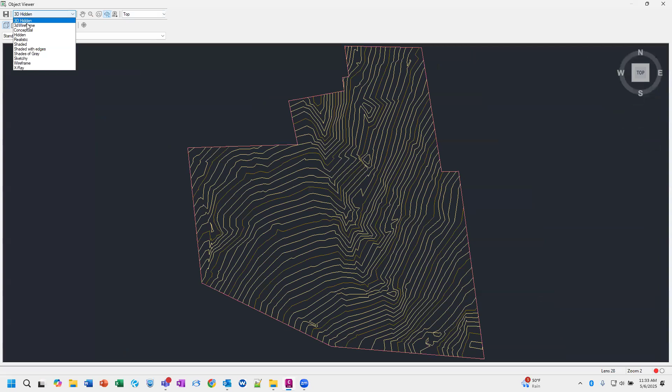This is old, this has been around forever. Let's see, I changed that to shades of gray. All right, and I can see this—but the problem is it locks up my drawing. I can't do anything in the drawing, it's frozen, and it's just here. This has been great, I use this all the time.

New in 2026 is this thing called the model viewer. Probably should get rid of Teams for the day, huh? I knew I would forget something. Oh wait, Tina. There we go, now I won't be bothered anymore by them. I'll get rid of Outlook as well.

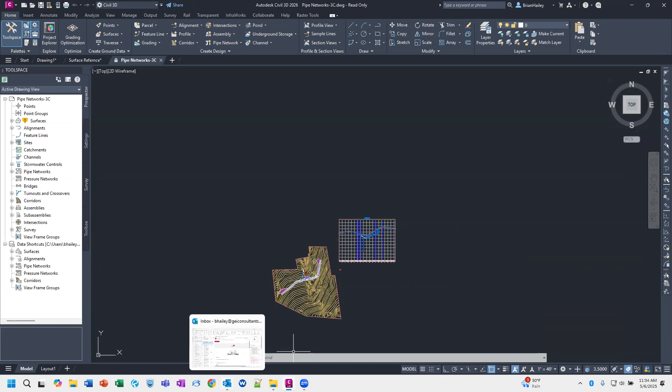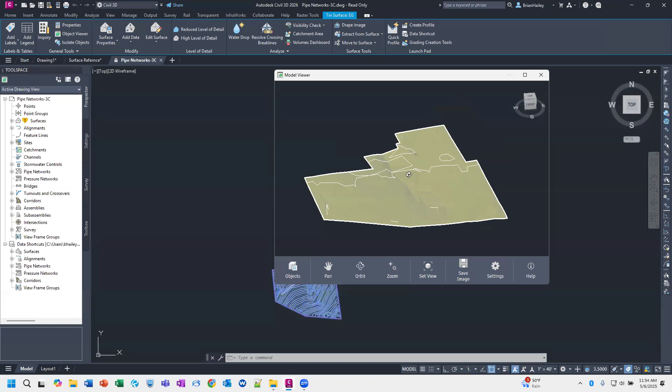Okay, so if you select an object, just like I did before, right click, you'll notice in the middle there's the option to add to model viewer. So this is the model viewer, and of course it comes up on my other monitor. It's very similar to object viewer—you can pan around, orbit, zoom in, zoom out. The nice thing about this is your drawing is still live, so you can continue to look around in your drawing.

You can pan around in model viewer, check out this thing over here. You can also add things to the model viewer—so I can grab my corridor, right click, and add to model viewer, and you'll see my corridor is now part of the model viewer. So you can have this off on your other monitor, so you can see what's going on in 3D and all that fun stuff.

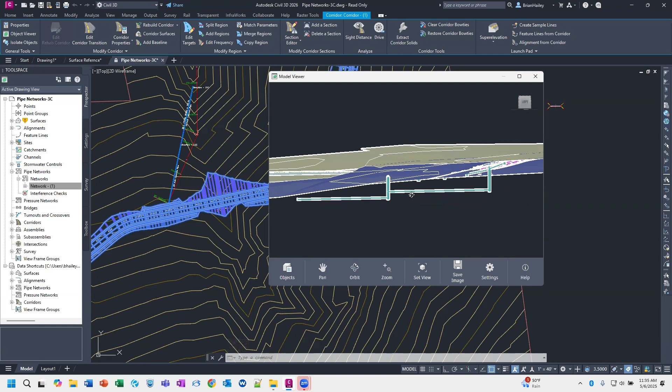You can also do this through the prospector. If I go to the prospector tab, pipe networks, right click on the pipe network, I can choose to add to model viewer. Now I have my pipes in the model viewer, and you can see down below my surface, there are the pipes. Pretty cool stuff here—knew your fourth monitor would come in handy, huh, Thomas? Yeah, I just have the three, so.

Now, another thing we can do with the model viewer is, if you notice, there's the option for objects. So if I click on objects, it opens up this little side panel. Let me make this a little bit bigger here. And I can change the display of things. So I'm no longer interested in the corridor.

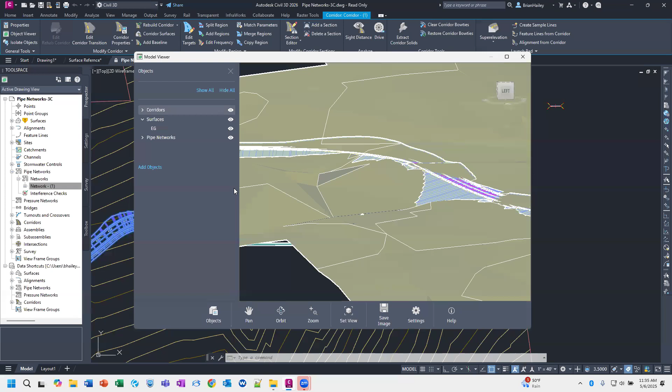I can just turn off the display of the corridor, and then I can turn it back on as well. Maybe I just want to see just the pipes. I can turn off all my surfaces, my corridors, and now I'm just looking at the pipes.

Now, one thing I would love to see, and I don't think this is an option, at least I haven't been able to find it, is I would love to be able to add a transparency to objects so I can see through them. Like right now, the surface is blocking my view of the pipes, so I actually have to come up underneath it to view the pipes.

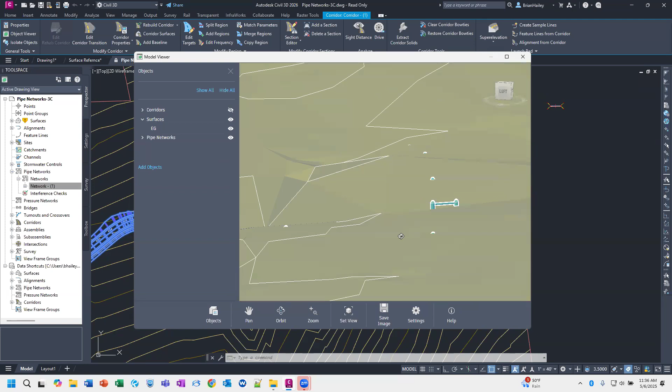What I would love is just the option to make this transparent. But if anybody knows if you can do that, please put it in the chat. I would love to be able to do that.

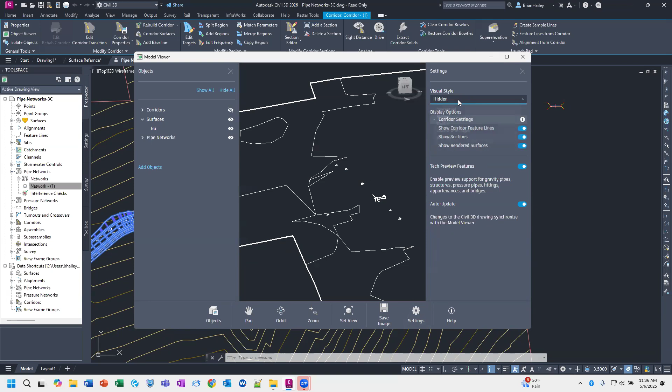All right. There are some settings. So if you come over here to your settings, you've got some corridor options. There's an auto update. You can change the visual style. So I can change it to like hidden, shaded, shaded with edges. Ooh. All right.

I'll probably just leave it set to conceptual. I'm surprised there's no shades of gray. That was always my favorite in the object viewer. But yeah. So that's the model viewer.

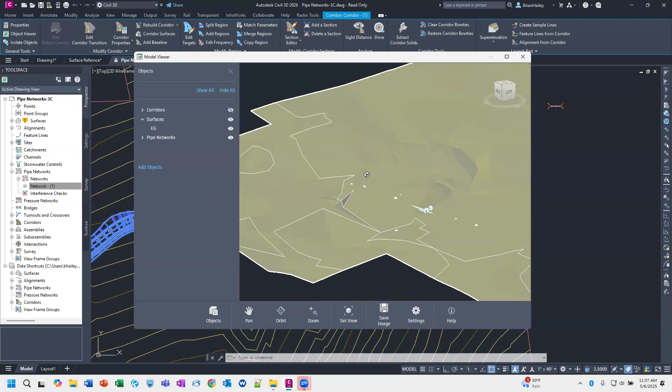And Chris says you've probably covered this more in depth than Autodesk ever will. Yeah, in what, 5 minutes there? Nice. Thanks, Chris. All right.

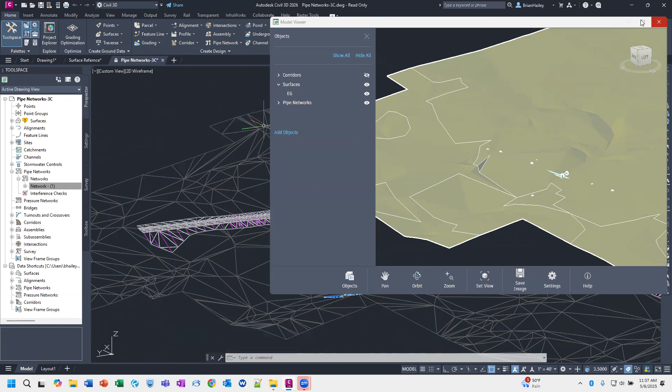So that's the model viewer. And again, one other thing, you can set the view. So as I'm working in the model viewer, maybe I actually want to see my drawing in 3D the way I'm looking at it here. I can set the view and you can see it switches my Civil 3D to match that view. All right, so that's model viewer. Let me go ahead and set that back to plan.

All right. Another thing that we can do is I'm going to come over here to this drawing. And what you can see is this surface here is a data reference. So if I come over here to my surfaces, you can see that this surface is a data reference. And this might be a really big surface, and I'm only interested in a small piece of it. So you'd either have to create a cropped surface and then reference that in, or you just have to bring the whole thing in and then maybe mask some of it.

But what we can do now is we can create a reference boundary. So when I select my surface, you can actually see up here on the ribbon, there's an option to add reference boundary. And mine's grayed out. And I have no idea why. Right? This is just a data reference. There's nothing unique or odd about it.

But I've done this before, and in prepping for today, I came in here to try to show it, and there's something different about the way things are set up now that I don't get the option to do this. But basically, you would just choose add a reference boundary, choose the polygon, and it would trim out the surface to just this area.

And my understanding is, and I haven't tested this, but from what I've heard, it will only reference that portion of the surface into the drawing. So you don't get the entire surface into the drawing, you just get the piece that you need. Now, you have to start off by referencing the entire thing, but then you apply the boundary, and then you just get that piece. And then if you want, you can change the boundary and then update the reference surface. So you can see the new limits of the boundary.

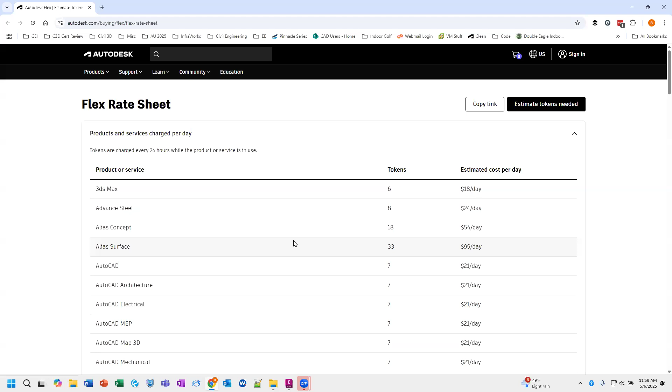So here's the tokens. Michelle put this in the chat. So you can see Civil 3D, it's $27 a day, 9 tokens. So I don't know if you guys know the way tokens work. If you open up the software and you close it within, I think it's 10 minutes, maybe 15 minutes, you don't get charged any tokens. But once you surpass that, you now have the program for 24 hours, right? And it costs you $27 for that 24 hours for Civil 3D.

Revit, I think it's 30 something. So that's funny, because if I open up Revit, it's 30. Most of my projects take more than 10 minutes to open, especially if it's on ACC and you've never opened it before. So that's kind of a crap.

I think it's geared more along the lines of, I double click the software, I was like, oh, I meant to open up Civil 3D instead of Revit, let me close Revit down. Yeah. Right. So it prevents you from getting charged for those types of things. No, depending on how many add-ins you have, Revit can take 5 minutes to open. So. All right.

And so here's how much it costs for each program. So Moldflow costs $567 a day. I have no idea what that is. That's a lot. That's if you're using like Inventor, and you want to make sure everything flows properly from your design because your manufacturing will flow properly. So it's one of those things where you're probably not doing that a whole lot. Yeah. So you can even get, here's InfoWorks ICM Ultimate. It's $225 a day. So that's like a water analysis program. So yeah, you can see. So if you ever wanted to try something, you can come in here and just get it.

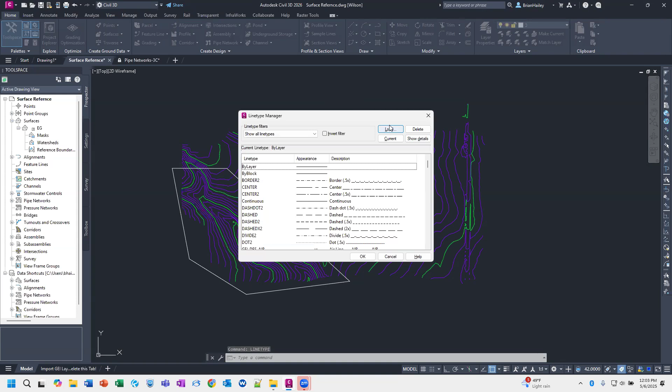If this is something you do regularly, you can actually automate it. So for example, let me switch profiles here real quick. I was saying that if the issue with the data reference boundary was because of my profile, and it wasn't. But so for example, we have this drawing setup button. And what this does is when you run this routine, it will actually load all of the line types into the drawing for you to make sure that you've got the correct line types in the drawing.

And so you can automate it through LISP routines or probably .NET or VBA or whatever, I don't think they're doing VBA anymore. So probably .NET. But yeah, you can automate it using that sort of thing. But again, you have to invest the time to create the routine to save you time. And so find one online.

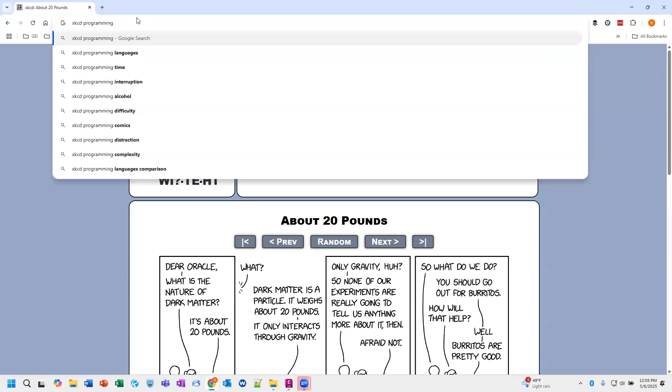Yeah, I don't know if y'all are familiar with XKCD. It is an absolutely fantastic comic, right? I'm sure you've seen some of these before, but they have one, is it this one? Here we go. Is it worth the time? So basically one axis is how much time you shave off, and on this axis is how often do you do the task. And basically this says, how long can you work on making a routine task more efficient before you're spending more time than you save across 5 years?

So now, for example, if you only save 1 second and you only do it once a year, you probably only want to spend about 5 seconds trying to automate it. So this is a great little chart.

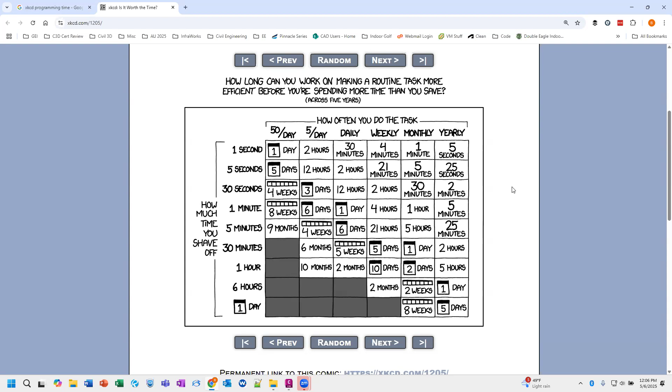I love this chart. And if you're not familiar with XKCD, just go spend a day hitting the random button and seeing what's there. It's an absolutely fantastic cartoon. So if you're geeky and mathy and sciencey, you'll love it.

Oh yeah. Tom said line types can also be imported through the Design Center and with a macro. Right. So Design Center, which absolutely is a valid option, and correct me if I'm wrong here. So here's my Design Center. The problem is you can only do it from another drawing. So you can't reload a .lin file. All right. But if you have a drawing that has all your line types in it, you can just go ahead and pull it from that drawing. So yeah.

So Tom pulled up the question from Quinn. How do I make this command toggle rather than ask for a prompt? And he's got Control-C _LWDISPLAY. All right. So LW, I'm not familiar with that particular command. So I'm assuming it's display. Okay. Yeah. So there's the line weight.

So I'm assuming it toggles your line weight display on and off, right? So LWDISPLAY, you can toggle it on and off. I don't have anything that has any line weights in this drawing, so it's not going to display. LWDISPLAY, and then it's asking you to turn it on or off, right?

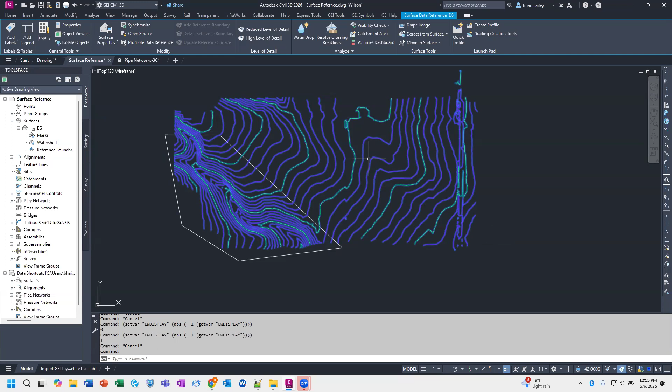This here is the data reference. This is a surface that is referencing the data from a surface in a different drawing. So we're referencing the data. The data shortcut is the tool that we use to create the data reference. The analogy I like to use is a desktop shortcut. Here I've got Civil 3D 2026. When I double click on this, it launches the program, just like a data shortcut establishes a data reference. Once my program is up and running, I've got Civil 3D running right now.

What happens to my Civil 3D if I erase this off my desktop? Nothing, right? My Civil 3D continues to run just fine. The problem is if I need to relaunch the program again, I either need to recreate this shortcut or launch it some other way. Just like with data references, once the reference is created, I no longer need the shortcut. If I get rid of the shortcut, the reference persists.

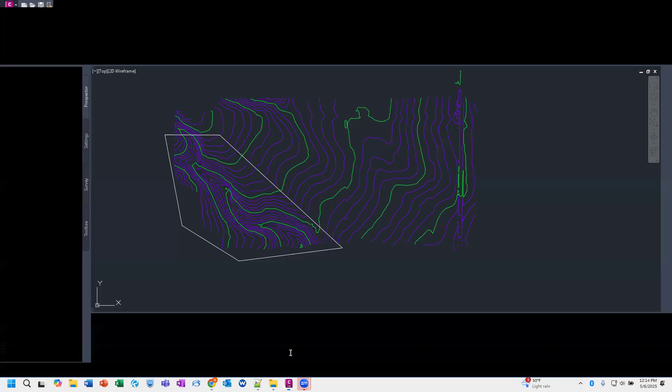However, if I want to reference that object again into another drawing, I either have to recreate the shortcut or reference it some other way. And there's not a whole lot of ways that you can reference things in Civil 3D without using a data shortcut. Plan Production Tools is the only way I can think of to do it. Right? Anyways, so that's just me going off on my little tirade about the difference between data references and data shortcuts, which had absolutely nothing to do with your question, right?

So the question was, if I create a surface on a layer, which is what that little prefix is going to do, does that layer go into the other drawing? No, because we're not referencing the surface into the other drawing. We're referencing the data of the surface into a surface in that other drawing. So in that other drawing, you're in essence creating a surface, and it's getting all of its data from that surface over there. We're not referencing the surface, we're referencing the surface's data. So no, it does not do that.

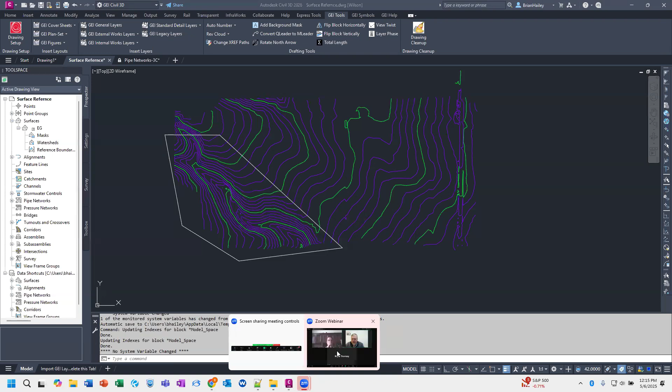And I lost all my stuff. And my chat, where's my Q&A? Fascinating. Oh, there it is. Okay. So hopefully that answered the question.

Cool. And then Nathan asked, is there a way to remove VBA objects from your drawing? We've installed VBA Enabler in 24, but still receive the pop-up when batch plotting, which is causing issues. I don't know. Is there a way to remove VBA objects? I don't know. I don't even know what really a VBA object is to say whether or not it can be removed or not. So I know what you're talking about, Nathan.

So when you open up an old drawing, it says, hey, there's VBA things in here. Do you want to convert or ignore? Right? That's what you're talking about, right, Nathan? Yeah. Yep. So I know what you're talking about. And I don't really know what that little warning is warning us about. I think it's because they switched from using VBA to .NET. And so there were like routines that were running in the program that were VBA, and now they need to be .NET or something along those lines.

And Tom asked if they're old subassemblies, so that might be. Right. I've seen it for pipe rules a lot. Have you? Yeah, pipe rules is one of the big ones. Okay. And once you remove the pipe rule, a lot of the times that goes away, or you amend the pipe rule. Good to know.

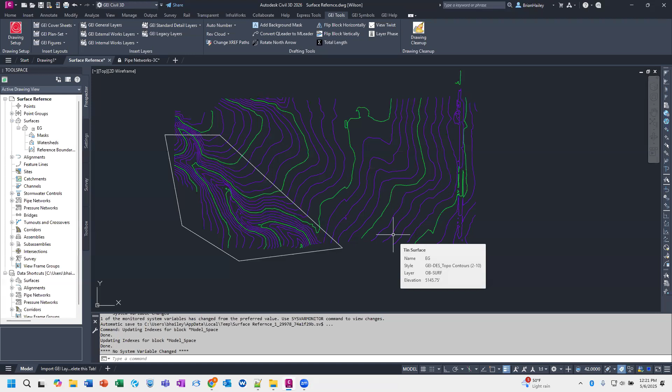Have you used the Civil 3D hydraulic modeling tools for culvert sizing? If so, any recommendations or tips? Looking into switching our work from HydroCAD / Culvert Master.

There are some tools up here under Analyze - the Express tools. This is on the Analyze tab, Design tools, Express. You can use the Manning's calculator to calculate all sorts of things like channels, and you can do a trapezoidal and a user-defined section. There's an option in here for culverts, but I don't trust this - I was playing around with it one time and my tailwater was higher than the headwater. Gotta watch out for that; I don't know how that happens. This is not something I would trust. This is the only culvert calculator within Civil 3D. The Innovyze software might have other tools that will help you with this, but yeah, I don't trust this one.

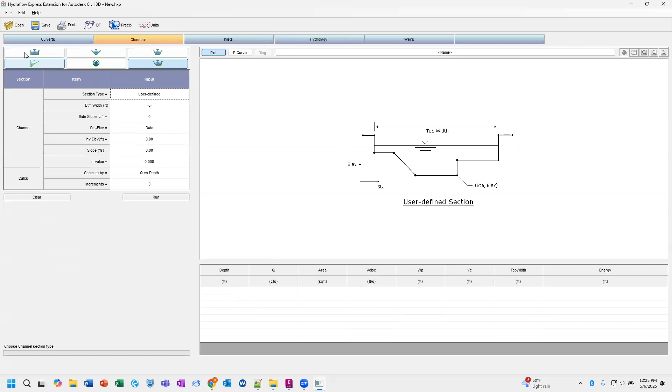Do you know of any other culvert analysis tools in Civil 3D, Brian? I know InfraWorks has some, but not really the same type of planning. Inside Civil 3D specifically, I do not know. Prior to this I was using Culvert Master - in the same instance, Culvert Master can do the same thing, where an individual was trying to push a certain amount of flow through and their tailwater was in fact higher than their headwater, because it was backing up. They didn't realize they had like 2 acre-foot of storage behind their culvert, and didn't realize it - they're like 'oh but it goes through.' It's kind of one of those things - this is a snapshot in time. I've had good luck with the channels though, this is basically a prismatic channel with steady state flow, Manning's calculation. So this seems to work well, but the culverts I don't trust. I'm used to Flowmaster and Culvert Master. All right, what else do we got, Brian?

Is there a way to fix the issue of a .lsp file not loading when using the drag and drop method of loading when multiple drawings are open? I don't know of an issue of LSP file not loading when dragging and dropping so multiple drawings are open. Is that something you're familiar with, Brian?

I have never, no. I use either AppLoad or write it into the acaddoc.lsp for auto loading Lisp routines. There are, I do as well. Yeah, I've never done a drag and drop.

No, I try not to drag and drop anything. I'll be absolutely honest, even when I've got my AutoCAD open, I will not drag a drawing into my AutoCAD to open it. I will still go old school, go file open and go to it. Okay, I don't double click on DWG files. I'm highly very nasty to people that do, only because in a world with many different profiles and many different standards, if you double click on a DWG, it's going to launch the last version of AutoCAD you had open with the last profile that was open. So you don't really know what it is.

I mean, Revit's a little different, but even with Revit, you can't do that either because it may launch the wrong Revit version, right, Brian? Yeah, but that's different than drag and drop. Yeah, 100%. If I have any program open, I have no problem drag and dropping. I mean, I do it to my children all the time. A program should be able to handle it.

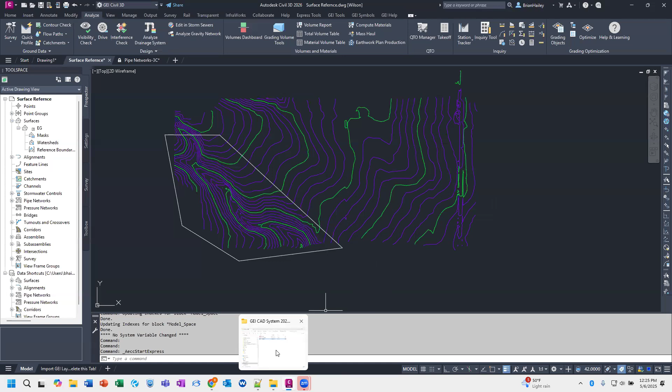But so if the program's already open, I'll drag and drop that program onto there, but I won't ever double click. Okay, and for some, you might not know this, but let's go find a drawing here. Let's see program. And while Brian's doing that, it's like, if it's open, that newfangled indoor plumbing don't work for me. I like to open it up from the outside. So yeah, that's just the way I work.

I got a friend that refuses to use the ribbon, they will only use the pull down. So yeah. Hey, so one thing I tell people is that I see people do this all the time.

They'll have Civil 3D open, they'll be looking at a drawing, and then they'll double click on the drawing in Windows Explorer, right? And like, no, don't do that. I agree with y'all on that, absolutely. But I don't want to have to go browse for this drawing that I'm looking at right here, right? I just want to open up this drawing.

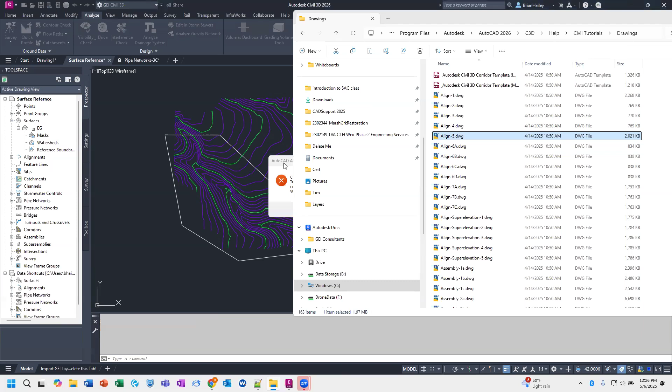So if you're one of those cases, a couple options. You can either take it and drag it to the command line, that will open the drawing exactly the same as if you went file open, or you can drag it up here to where your tabs are, and that will open up the drawing. So this is a tutorial drawing, so it's read only, but I now have that drawing open. So that's what I tell folks: if you're looking at the drawing and don't want to go browse for it, just drag it to either the command line or your tabs along the top.

Or the other option is to copy, as Corey put down there, to copy the path from Windows Explorer and paste it into there. You could do that, but dragging it is just a lot easier.

I think a lot of people don't know this. We go back to Windows Explorer. Yeah, if you right click on the file, you can say copy path. And not only will it copy the path, it will actually copy the file name with that path. So then it'll automatically say, hey, I'm going to do this dwg.dwg. So it's not even like it browses you to the folder and then you have to find that file. If there's 100 files in that folder, it will actually grab the entire DWG itself.

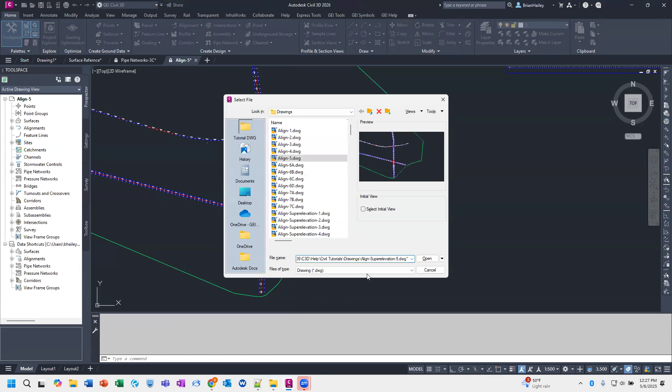Yeah, so if I go open and then I just paste that in. Yep, so it has quotes. Does that affect it? Nope. I've never done that because I always knew it had path, like they go to the top of Windows Explorer, they copy the path. But if you actually right click on the file and do copy path, it gives you the file name and extension. Yep, so therefore it will open it up in the program without having you browse in that folder.

And if you're using an older version of Windows, if you right click and you don't get the copy as path option, you can shift right click and then you'll see copy as path.

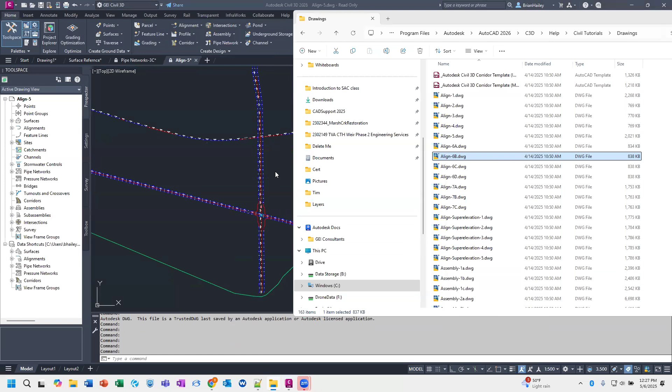All right, what else we got? We got 3 minutes.

Rotate command, but always pick the center of the block as the rotate point. I gotcha. Let's see, tool palettes. I'll just throw a block in here.

All right, I want to rotate this and I want to use the insertion point, which is the grip, right? You can just grab the grip and use your grips to do this. So when you grab a grip, I'm moving the grip. I'm sorry, I'm stretching the grip, and because this is a block, it's the same thing as moving. If I hit the space bar, I'm now moving the block, which is, again, the same thing as stretching in this example.

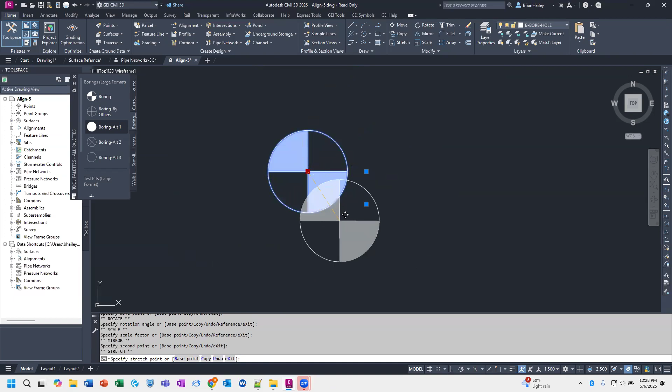But if I hit space one more time, I'm now rotating the block. And if I hit space again, I'm scaling it. Hit space again, I'm mirroring it. Hit space again, I'm back to stretching. So we're stretching, we're moving, we're rotating, we're scaling, we're mirroring. All right, so you can just grab that grip, hit space twice, and you're rotating it.

Now, if you need to do a whole lot of them, you just go into the properties and change the rotation value.

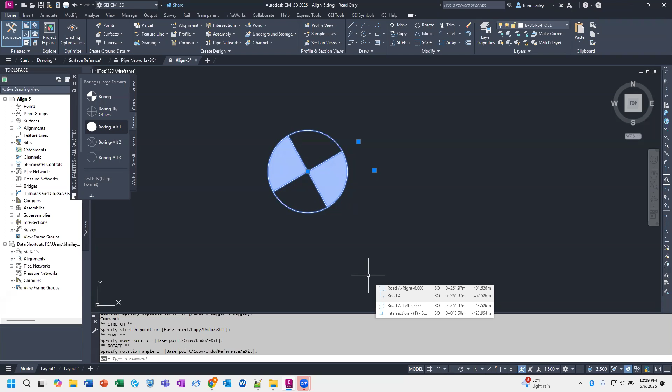And last question from Tom: would you please show how it is to access the infrastructure features product roadmap for Civil 3D? I don't remember how to access it. It's called Google. Let me Google that for you.

I think Ryan, you did that to me once, didn't you? Yeah, I'm sure I have. I know you've done it. Yeah, he's the one who taught me how to let me Google that for you. Exactly. They've changed it though.

So yeah, if you just do a search for infrastructure roadmap Civil 3D, you'll be able to find it somewhere. There's Revit, there you go. But yeah, just do a search for it, you'll be able to find it. This is what the Civil 3D team is working on, what they're planning on working on immediately, what they've got in the pipeline, what they're maybe thinking about.

Do you have to have that? I don't know if I'm. Yeah, so if I come over here to in progress, you can see they're currently working on Civil 3D Revit interoperability, horizontal regression analysis, which will be awesome. I have no idea what that is.

And usually what in progress means, you'll either see it in the next version or a point version. Hopefully, usually that's what it means. Point version followed by a point release. And then, for example, on the latest launch, there's the model viewer, reference sub area of data shortcut surface. That was what I tried to show you but failed miserably doing, things like that.